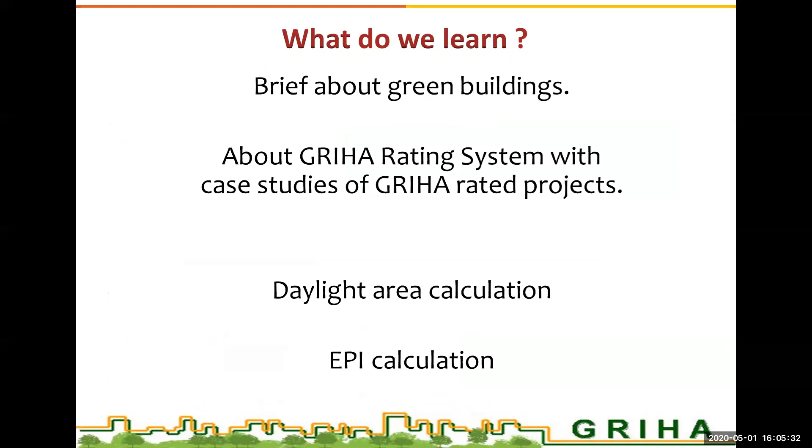So let's understand what is a green building. I request Mr. Veer to roll out the poll, please.

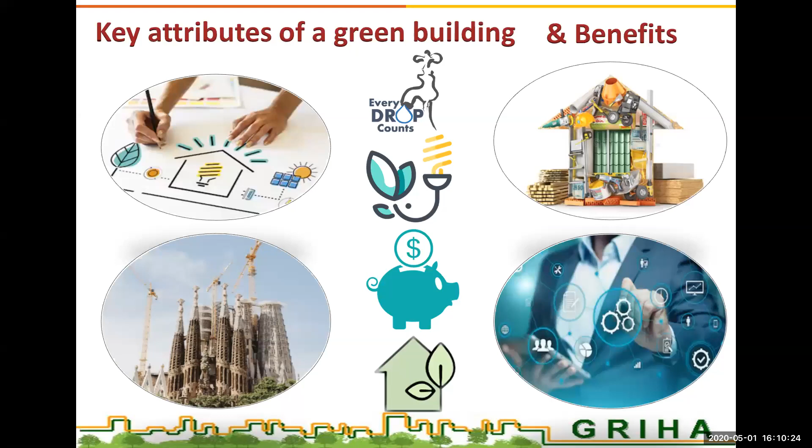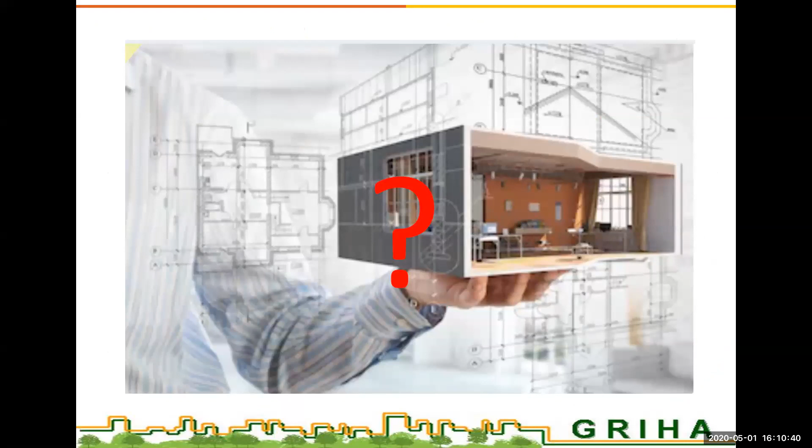But how do we design them? As we all know, for initiating the process of design, climate analysis plays a crucial role in envisioning the design of the space. Let's familiarize ourselves with the types of climate zones.

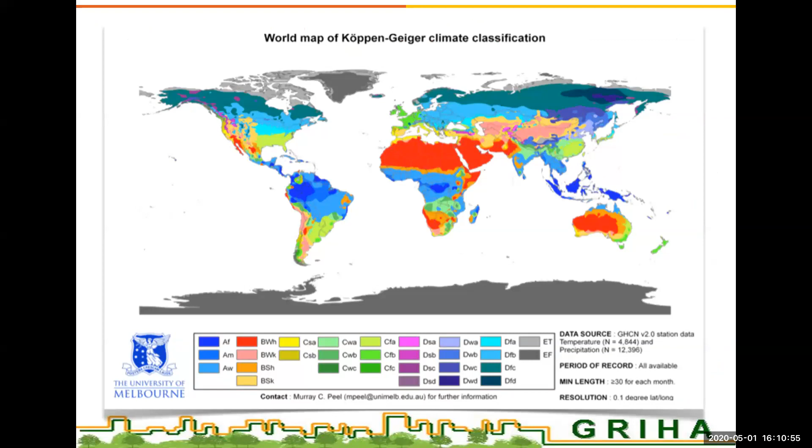Let's check how many India has as per Köppen classification. Yes, India is composed of 11 different types of climates.

But do we have any climatic classification for India of its own? Yes. NBC has classified India into 5 climatic zones, namely hot and dry, warm and humid, composite, temperate, and cold.

The building industry develops depending on 3 major factors: climate, land availability, and population for whom the structure is being built. For standards and codes, the whole world will always look towards the West, especially USA, because it has got the best standards in terms of being a developed country.

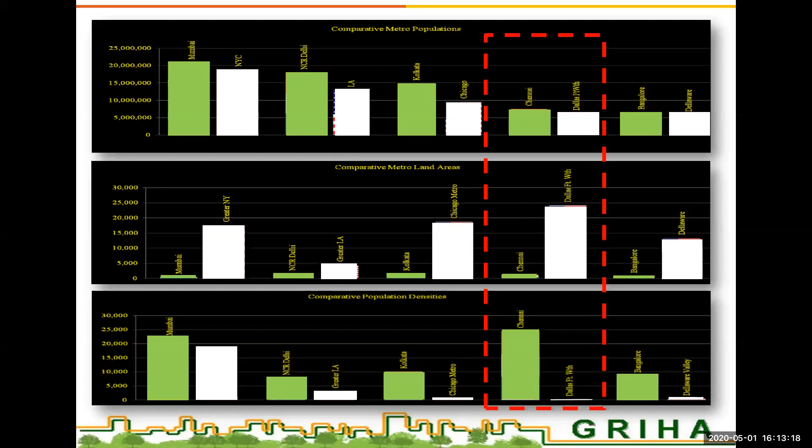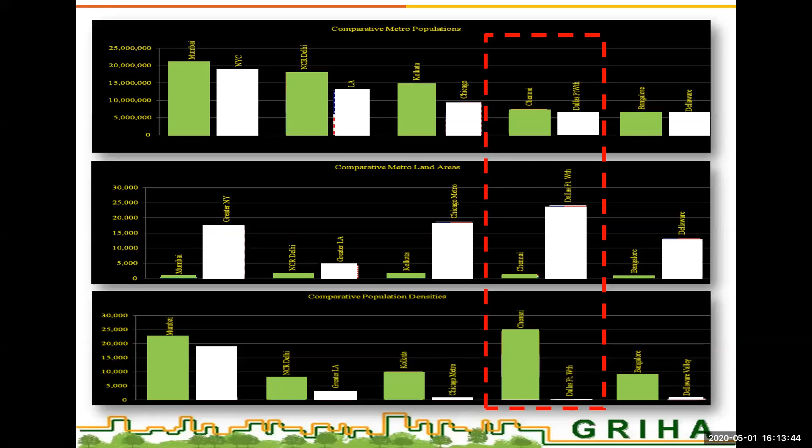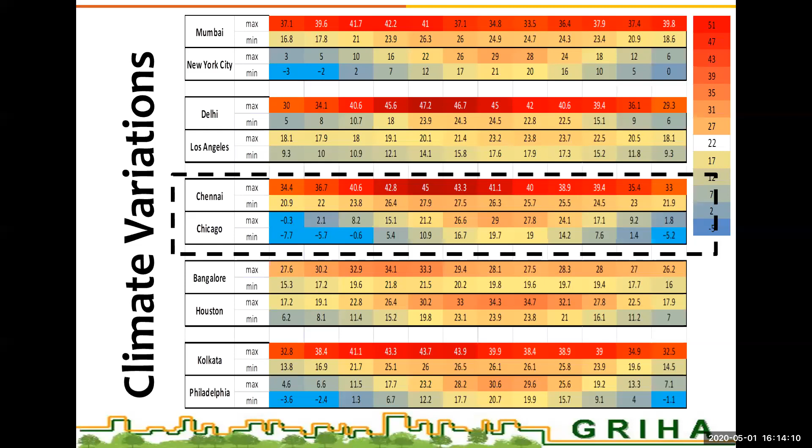We have to understand that informed decisions play a major role, rather driving the design of that space.

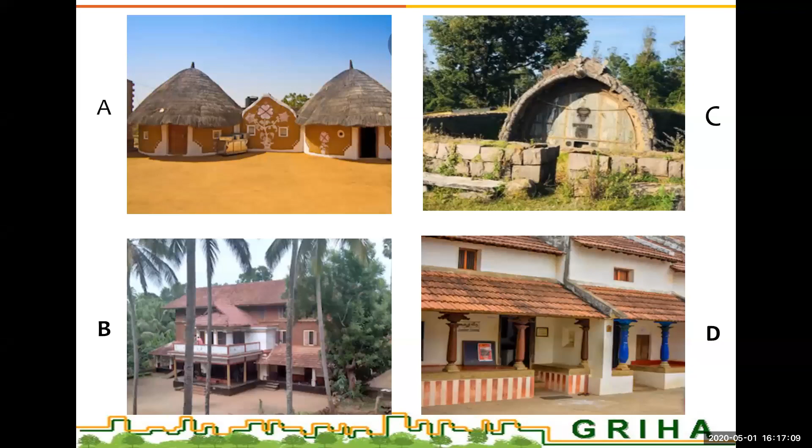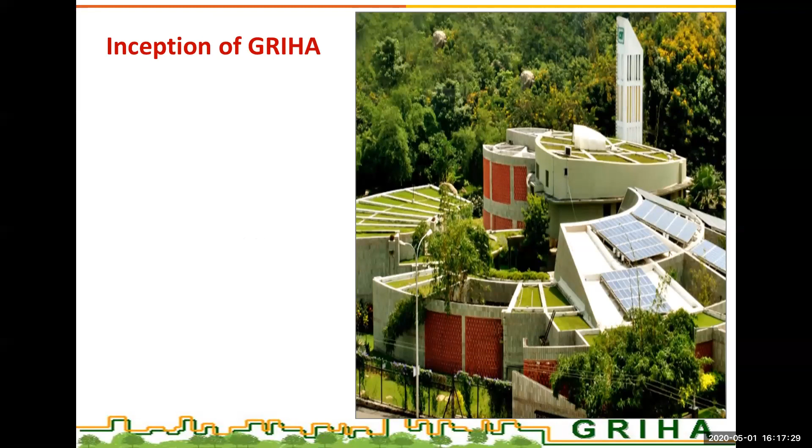Inception of GRIHA. I'm sure everybody knows which building this is. Yes, this is the office of CII, Confederation of Indian Industry, located in Hyderabad, Telangana. This is India's first green rated building. Most people are not aware that TERI, The Energy and Resources Institute, was the consultant for this project. Later, in the year 2001, this project was awarded LEED Platinum rating. During the course of work on the project, TERI realized that the Indian construction industry needs a rating system tailored for Indian climate. From then, TERI started working on green rating and released TERI GRIHA in the year 2005.

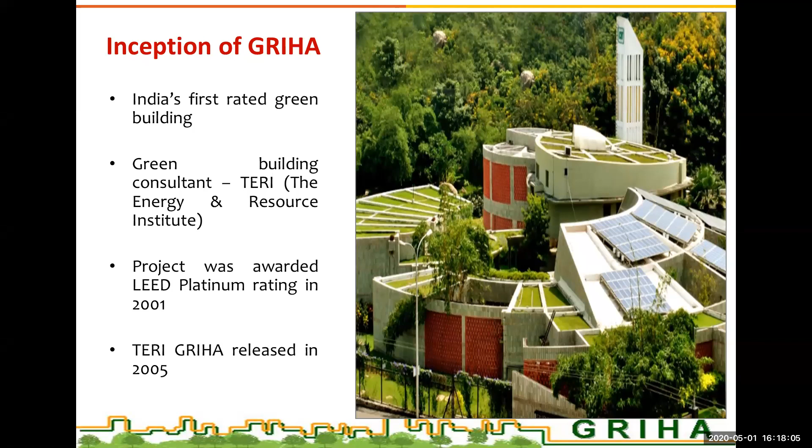GRIHA stands for Green Rating for Integrated Habitat Assessment. GRIHA is a tool developed to measure the greenness of a building throughout its life cycle. And when we talk about life cycle, this tool helps in the designing, construction, and operation of a green building. As a matter of fact, we'll be able to manage or control anything, may it be human resources, may it be food we eat, or time. It can be managed only if we keep track of it, count it, or measure it. Yes or no? Yes, only if we keep a track of it.

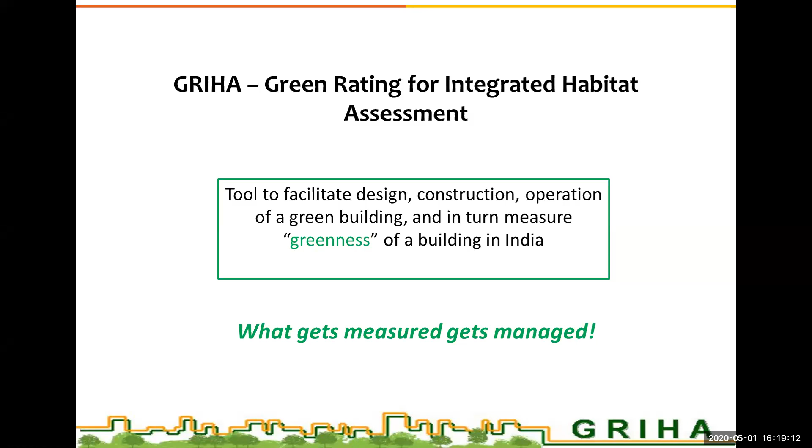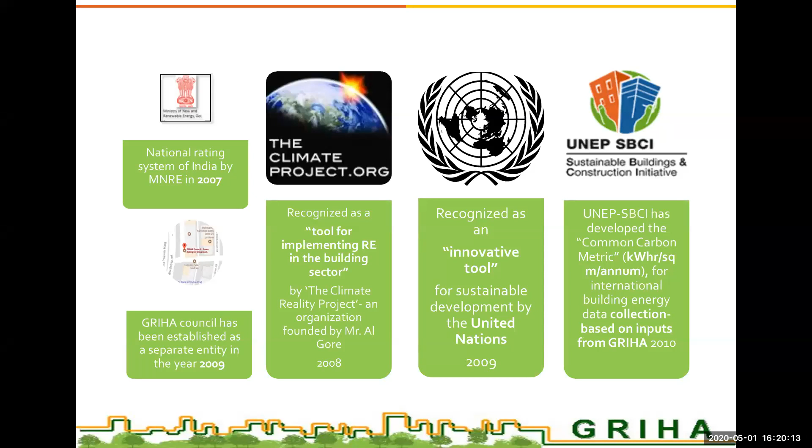Adapting the same principle, if you look at the GRIHA criteria, benchmarks are provided to measure the performance of the building. That's the principle behind GRIHA rating: what gets measured, gets managed. Later, in 2007, GRIHA was recognized as the National Rating System of India by MNRE, the Ministry of New and Renewable Energy. In 2009, GRIHA Council was established as a separate entity. GRIHA has been recognized as a tool for implementing renewable energy in the building sector by the Climate Reality Project, an international organization founded by Mr. Al Gore, in 2008. It has been recognized as an innovative tool for sustainable development by the United Nations in 2009. And in 2010, UNEP, the United Nations Environment Program, SBCI, Sustainable Buildings and Construction Initiative, developed the carbon metric for international building energy data collection based on GRIHA inputs. GRIHA rating has been recognized as India's own green building rating system and part of the mitigation strategy for combating climate change in India's INDC submitted to UNFCCC.

I'll give you a quick peek of the benefits of GRIHA rating. What are the benefits that a project gets going for a GRIHA rating? A reduction in energy consumption by 30 to 50%, integration of renewable energy to offset grid demand, reducing building water consumption by 40 to 65%. It ensures health and safety of construction workers on site, ensures compliance during operation with the help of post-occupancy performance audits, ensures waste management during construction and operation, helps in reducing lighting energy by 5 to 30% or its equivalent met through renewable energy production, and reduction in operational cost by 30 to 40% with negligible impact on the project cost.

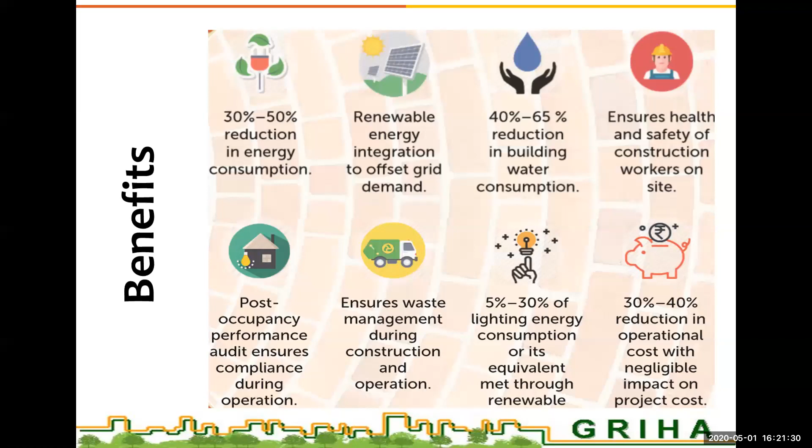GRIHA has more than 2,000 projects registered right now, with almost 850 million square feet of built up area registered under GRIHA rating. Municipalities like Pune, Pimpri Chinchwad, Noida, Greater Noida, states such as Delhi, Punjab, Goa, Sikkim, and organizations like CPWD and NBCC have adopted GRIHA rating for their infrastructure.

GRIHA has a vast catalog of variants, and buildings like homes, offices, schools, hospitals, apartments, larger campuses, restaurants, museums, and infrastructural facilities like airports can be rated under GRIHA rating.

With a vast catalog of variants, GRIHA looks at the building from two standpoints: new buildings and existing buildings. Under the new category, GRIHA offers 4 different ratings, and under the existing building category, GRIHA offers 2 different ratings.

The first category under new buildings is SVA-GRIHA, which is Simple, Versatile, Affordable GRIHA, applicable to a project with built up area less than 2,500 square meters. The next rating is GRIHA, applicable to projects with built up area of more than 2,500 square meters.

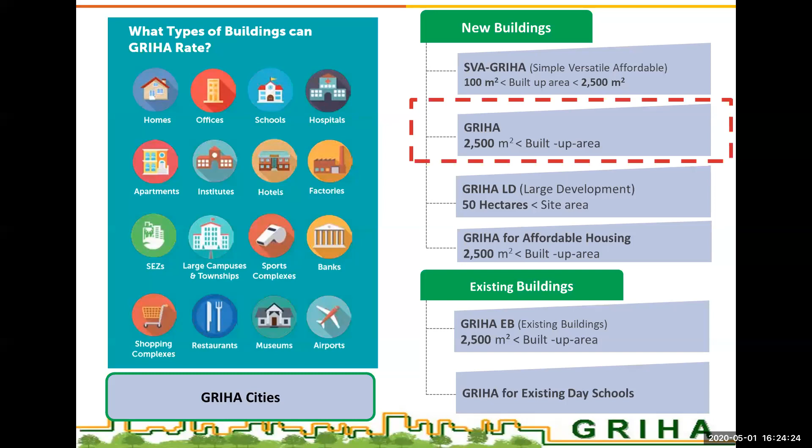What are the key features of GRIHA rating? It's a performance-based rating, wherein if the performance of the project is better—for example, higher savings in energy from the GRIHA benchmark, lesser generation, reuse, recycle or disposal of waste, etc.—it attracts a higher rating for the project. It's a common sense oriented rating system with a non-applicability clause, based on the individual project, its scale and its requirement. Every project is unique and may not necessarily meet certain facilities or provisions; in that case, the project can opt for non-applicability.

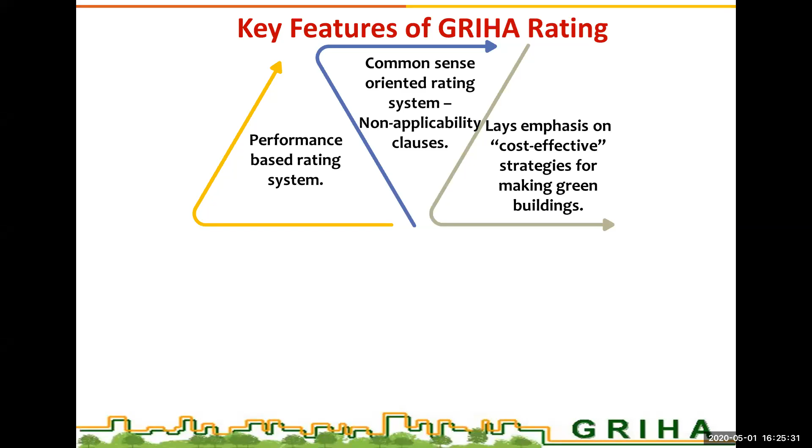GRIHA lays emphasis on cost-effective strategies for making green buildings, believing that installation of high-end technologies doesn't necessarily guarantee the building to be green. It also emphasizes an integrated design approach towards envisioning green buildings.

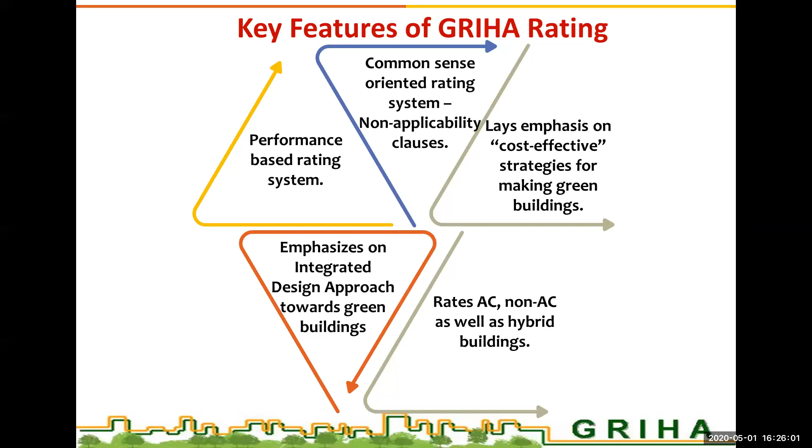GRIHA rating is meant not only for AC buildings, but also non-AC as well as hybrid buildings, which can be rated under GRIHA. When should a project team, or at what stage of the project, should the team approach GRIHA for the building to be rated?

For most construction projects, which may vary based on their size, the number of stakeholders involved, the budget, delivery date, etc., the project's life cycle, from the simplest to the most complex, is categorized into 4 different stages.

The preliminary stage of the project is design. That includes programming and feasibility, schematic drawings, design developments, and contract documents—this is what is called the design stage.

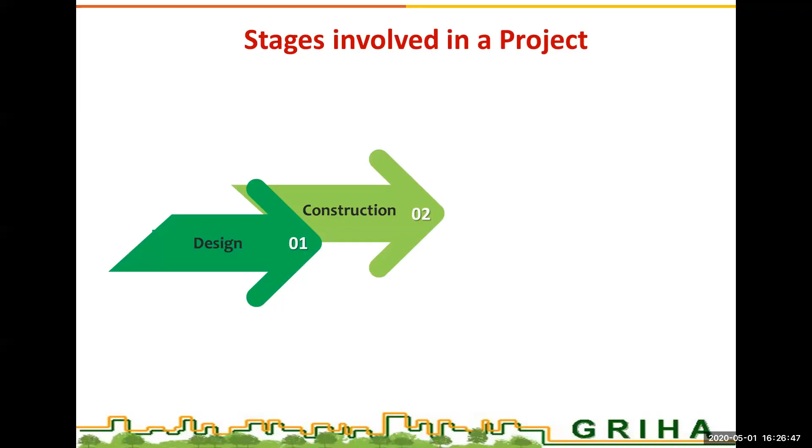In the later stage, construction of the design takes place. Various aspects like quality control of the project, how and where to store all the materials, the working hours, the project schedule, and when the project is completed all come under construction.

Then comes operation. The owner or tenant occupies the building and starts using all the different systems, equipments, and materials that have been installed or used in the project—this is operation.

Any system without proper care will not work to its full efficiency, so maintenance also plays an important role, not just building. The maintenance stage encompasses issues like the equipment used, the systems installed, their control procedures, regular maintenance schedules, and whether any specific team is required to carry this out—all these aspects come under the maintenance stage of the project, which plays a major role in maintaining the building and its systems.

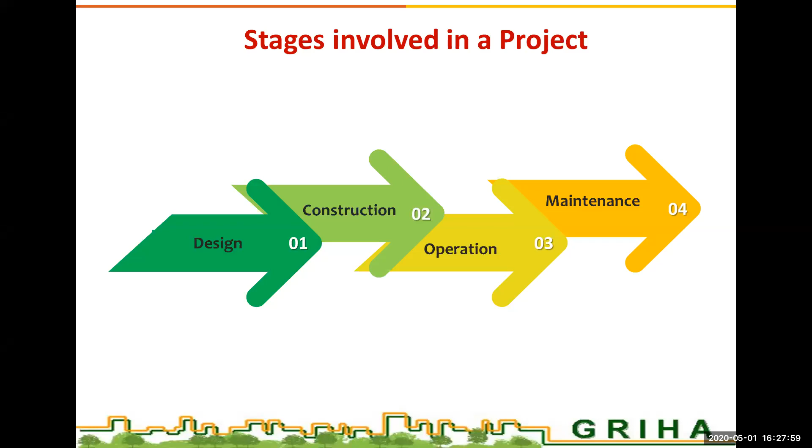But where does GRIHA come into the picture, or at what stage? GRIHA encompasses all the stages of the project, right from the beginning, the design stage, till the maintenance stage. The project should approach GRIHA during the design stage itself.

So let's look at GRIHA ratings. GRIHA rating has been classified into 9 sections, such that all the stages and processes of the project which were discussed earlier has been categorized and encompassed into these 9 sections.

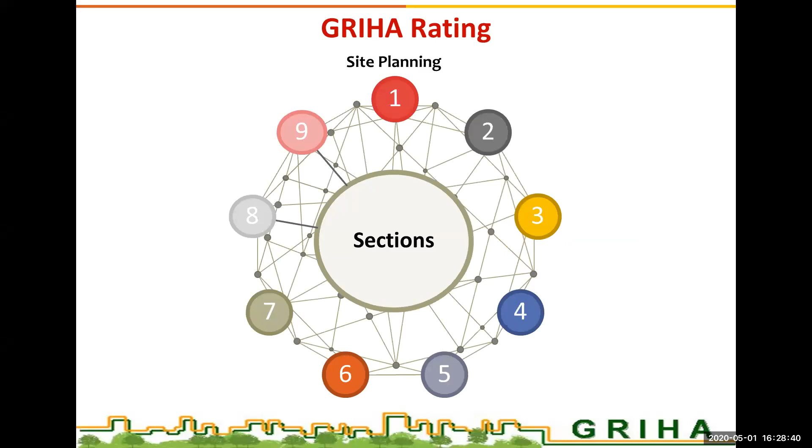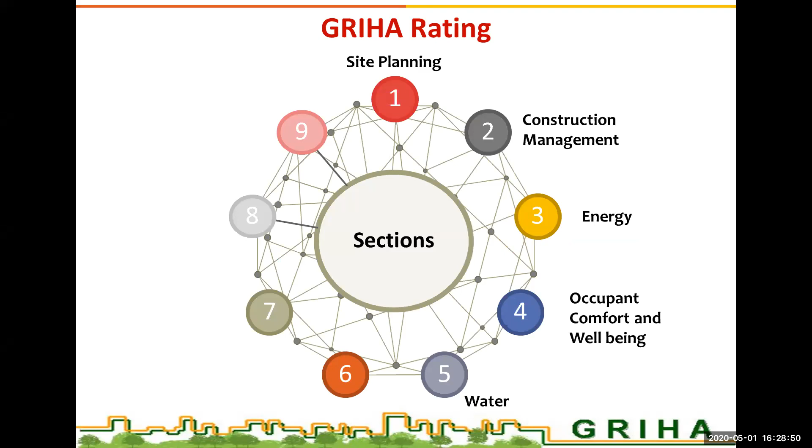It has been further divided into criteria. The 9 sections, 31 criteria. The 9 sections are site planning, construction management, energy, occupant comfort and well-being, water, sustainable building materials, solid waste management, socio-economic strategies, performance monitoring, and validation. These 9 sections are further divided into 31 criteria.

The sections and the overview of all these sections will be covered in this webinar. These sections are weighed at various weightages.

If we look at site planning, it accounts for about 8%, energy 20%, occupant comfort and well-being 12%, water 17%, sustainable materials 14%, construction management 9%, solid waste management 6%, socio-economic strategies 6%, and performance monitoring and validation 8%. If we look at it, energy constitutes a higher percentage of 20%.

Next comes water, which is 17%, and then sustainable building materials, which encompasses 14% of the total rating.

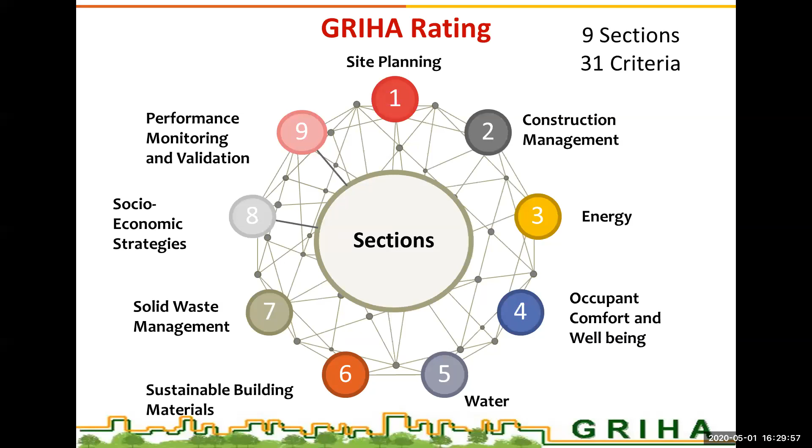How does this rating system work? It's a percentile-based rating system. The proposed rating scale for the project is: if the project acquires a percentile of 25 to 40, it acquires 1 star. A further spike of 15 points will make the project eligible for an upgrade in the rating it receives, by 1 star. Let's go into the details of the rating process as such.

GRIHA strictly follows a paperless rating system where all the registrations and submissions of documents are done online. For any project to be rated under GRIHA, the project team has to first register with GRIHA at www.grihaindia.org. A project is considered registered only after confirmation of payment and the project being issued with login credentials for further process.

Post-registration, GRIHA Council officials will conduct an orientation workshop with the project team. This team should necessarily include the architect, owner, builder, HVAC consultant, MEP consultant, and any other consultants associated with the project. The workshop is aimed at explaining to the project team the rating process and the necessary documents to be acquired or collated for submission for compliance with GRIHA rating.

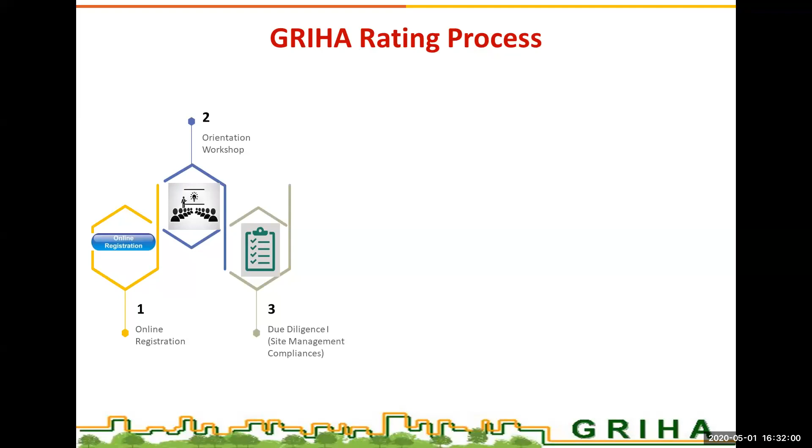Once the construction is complete or on the verge of completion, the project team is supposed to submit the entire documentation back to us online, stating that the project is ready or about to be completed, inviting us to proceed further in the process of rating.

The GRIHA Council team executes a preliminary evaluation. After the preliminary evaluation is done, simultaneously, a final site visit is scheduled and done. In this final site visit, we make sure that all that is claimed in the documentation submitted for preliminary review is in place on the site or not.

The project team is required to submit the final documentation as per the comments and feedback provided in the preliminary review and also in the final site visit report submitted by GRIHA Council officials. After this final evaluation is done, based on the documentation submitted and observations during the final site visit, GRIHA provisional rating is awarded to the project.

It is only after the submission of a post-occupancy audit report of the project with at least 75% occupancy for a year that the audit report will be reviewed and the final GRIHA rating is awarded to the project.

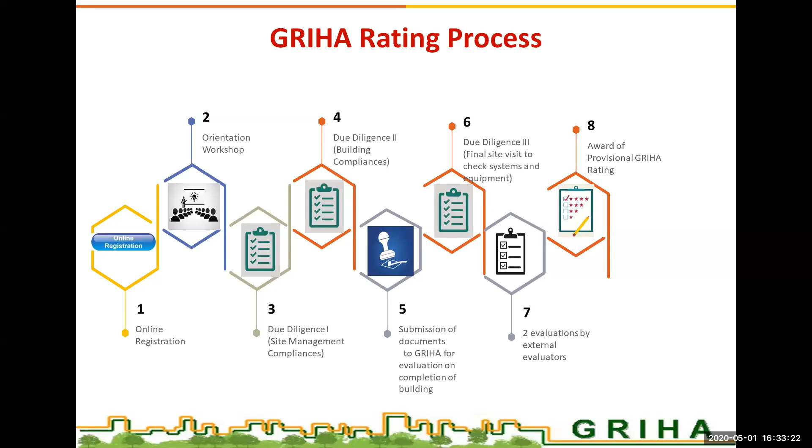Now I'll explain the GRIHA version 2015 section-wise, as explained to you earlier. As I've mentioned, GRIHA version 2015 is classified into 9 sections and further broken down into 31 criteria.

Each criteria is structured with an objective, which is what is to be achieved, that is the intent; with a requirement, as in what commitment is to be done by the project; with an implementation, what compliance should be done for that particular criteria to meet the requirements; and validation, as in how it will be checked.

In all these criteria, there are 4 different types of variations: mandatory, partly mandatory, non-applicability, and those which earn the project points. Mandatory means a project should definitely meet that criteria, otherwise GRIHA rating is denied. Partly mandatory is when a criteria has subsections in it which are mandatory, then it is considered partly mandatory.

Non-applicability clause is when a project provides sufficient documentation saying that the project doesn't need to go for a particular criteria, then that is considered as non-applicable. And more savings can earn more number of points.

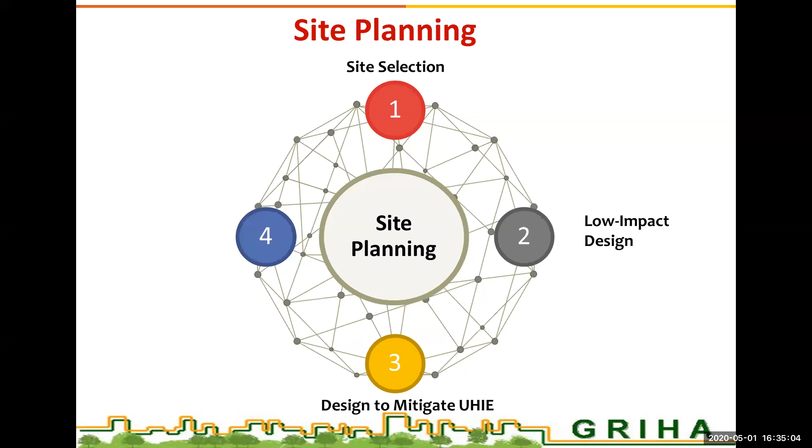The first section is site planning. This is further broken down to 4 different criteria, mainly site selection, low impact design, design to mitigate urban heat island effect, and also site imperviousness factor.

Site selection: this section makes sure that the site meets relevant master plans, local development plans, which is mandatory, to promote design strategies which enable the project to factor in ways in which the natural site features can be protected or incorporated into the project design, to ensure incorporation of site design strategies which assist in reduction of urban heat island effect, to also ensure implementation of site design measures which assist in reduction of overall site imperviousness factor, reducing urban rainwater recharge, which plays a major role for urban flooding if not addressed.

Urban heat island - what exactly is urban heat island? The phenomena of where a city center gets warmer than the surrounding areas is what is urban heat island. How can we reduce it?

We can provide soft pavings, covered with high SRI coatings, shaded by trees, shaded by vegetated pergolas, shaded by solar panels. And if the project is a brownfield or redevelopment project, or there are at least 5 basic services within walking distance of 500 meters from the entrance gate of the project, then that project will earn more points in this section.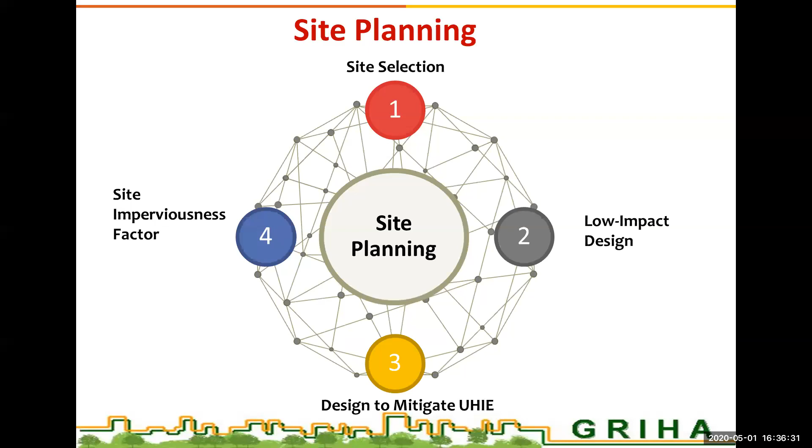Let's look at a case study. This is Akshay Urja Bhavan of Panchkula in Haryana. This building is technically oriented, placed on north and south axis in order to receive sun from the southern side.

Most windows are placed on the north facade of the building to keep the building naturally daylit. East and west windows are oriented towards south to have easier sun control through the shading devices. South has a wide spread of landscaped area.

East and west windows are oriented south. These windows help the office spaces on those faces to receive daylight. Central courtyard and single loaded corridors help provide visual comfort by natural light.

Solar chimneys to the south were built to aid ventilation through stack effect to some of the non-AC spaces in the building. Misting is also done in the courtyard to cool the ambient air, which is circulated into the building through the stack effect of solar chimneys.

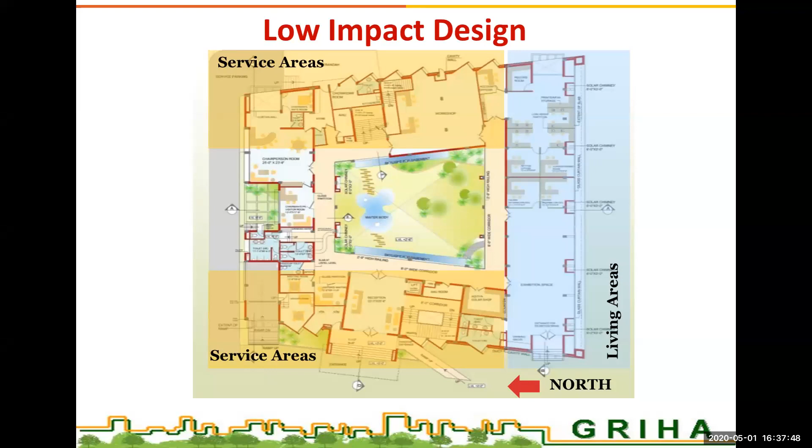AAC block masonry cavity walls along with XPS foam insulation is done in east and west facades of the building, and fly ash brick masonry done in north and south facades of the building.

Let's move on to the next section, which is construction management. This section is further broken down to 3 criteria. As the name explains, this section looks at the ways to manage or take necessary and relevant measures during construction.

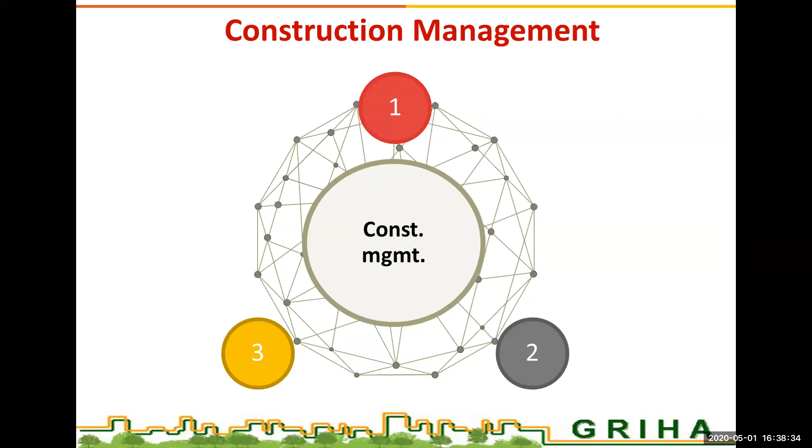So the intent of this section is to minimize air and water pollution during construction on site, adopting three strategies in which providing 3-meter high barricade through the periphery of the site is mandatory. It further ensures to preserve mature trees and fertile topsoil on site, minimizing the impact of construction activities on existing landscape.

This project can opt for non-applicability if there are no mature trees on site, if the topsoil is not fertile and cannot be made fertile through organic means. It is mandatory to ensure that no existing mature trees are cut on site, or transplant mature trees within the site and ensure that they survive, or plant 3 trees for every 1 tree cut of the same species, or a combination of all the above.

Providing wheel washing facility at the vehicular entrance of the site, covering the fine aggregate of building materials and excavated earth on site with plastic or geotextile sheets, implementing spill prevention plan, planting more native trees, preserving topsoil during construction, and ensuring adoption of good construction management practices on site can earn more points to the project.

Let's move on to the next section, which is energy, which takes up about 20% of the total rating. This section is further broken down to 3 criteria: energy efficiency, renewable energy utilization, and low ODP materials.

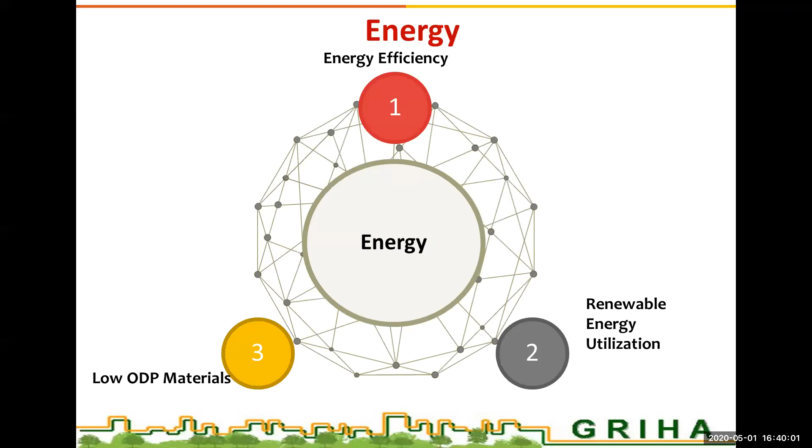We have to understand the basic concept of reduced energy is because if the occupants in the habitats are using less energy, which means they are facilitated with measures that ensure less energy consumption in the project, then also adding up to supplying the energy through renewable energy sources.

So the intent of this section is to ensure the efficiency of the project, making sure the project meets the mandatory requirement of ECBC, and all fans must meet BEE 5-star rating. This is mandatory.

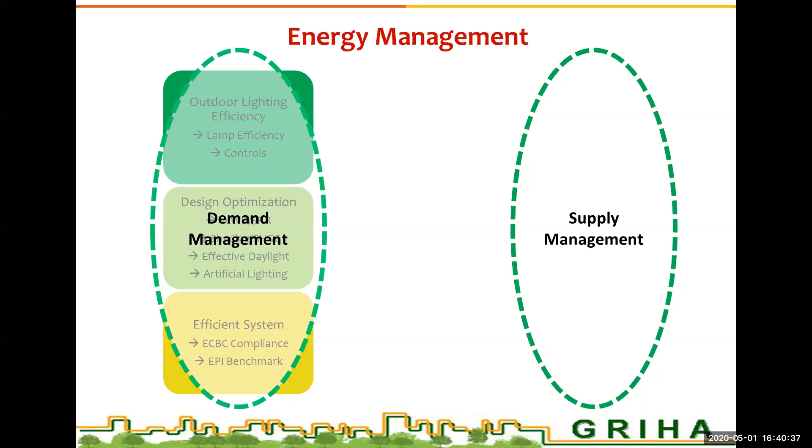The project EPI should be below GRIHA benchmark. What is this EPI? EPI is nothing but Energy Performance Index of the building, which helps in understanding the performance of the building in terms of energy. It is also to ensure incorporation of renewable energy sources in the project, which offsets a part of annual consumption of internal artificial lighting and HVAC energy demand.

Note this, we only calculate or look at internal artificial lighting and HVAC load for calculating EPI. This is mandatory. To ensure the use of materials in building insulation, such as HVAC and building insulation, and providing refrigerant in HVAC and firefighting systems which is of low ODP materials, it is also mandatory. And if the peak heat gain through the building envelope meets the GRIHA benchmark or peak heat gain factor threshold, which is only meant for AC buildings which are non-residential, then also the project is considered energy efficient.

So if 100% of outdoor lighting fixtures meet the efficacy requirements of GRIHA, or if the renewable energy systems produce more than the GRIHA benchmark, then the project can opt for additional points in this section. If a project can achieve energy demand reduction and can also produce renewable energy, this results in reduced energy consumption.

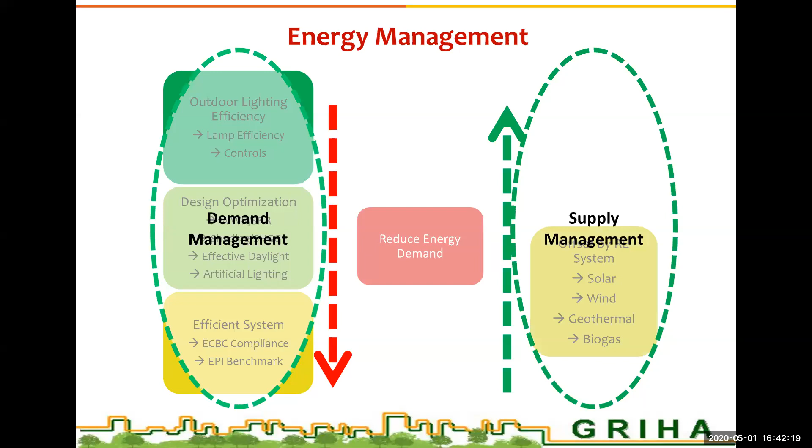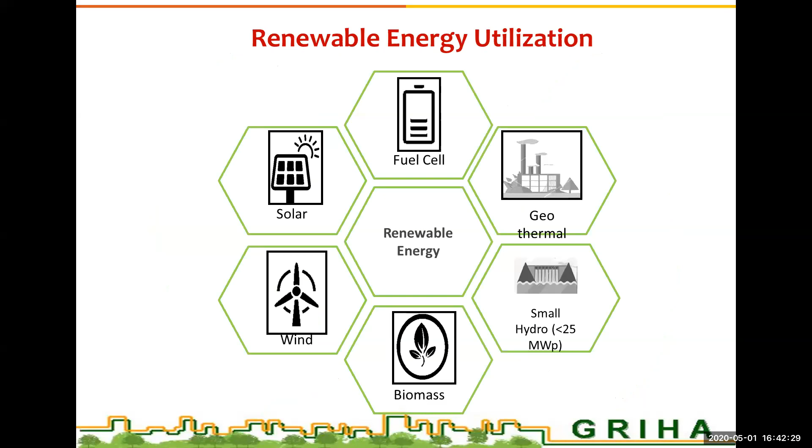So how can we produce renewable energy? There are different ways of producing renewable energy through fuel cells, geothermal, small hydro plants, through biomass, wind energy, and solar power as well. Nowadays, solar panels that can act as a roof or a facade, or building integrated photovoltaic panels, are also seen in the market for use.

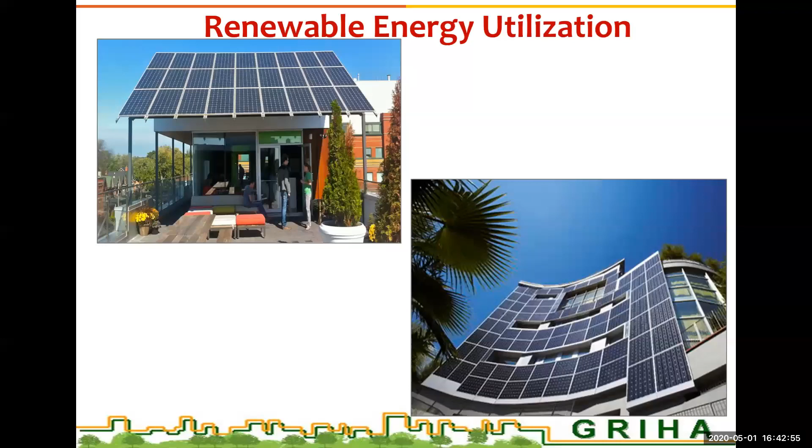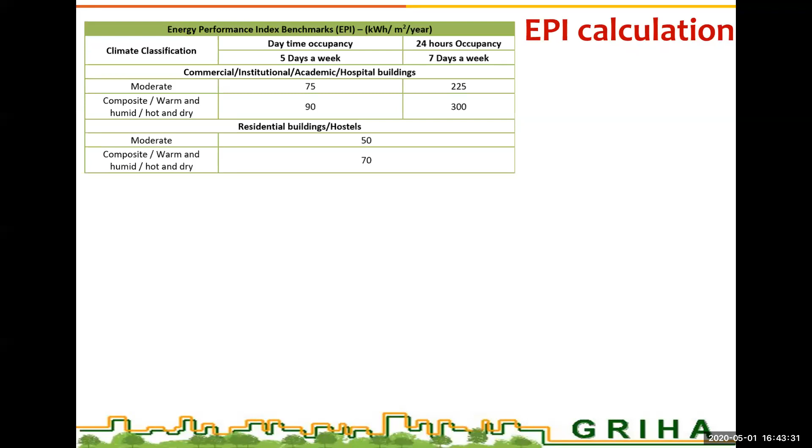I'll explain how, for example, let's say this project is an office building located in New Delhi. The minute a project is mentioned that it is an office building, it comes under the first category, which is commercial, institutional, academic, hospital buildings. And it is located in New Delhi, which comes under composite climate. So we consider the occupancy schedule, which is a daytime office building, 5 days, 8 hours per day, which means the benchmark GRIHA prescribes for this office building in New Delhi with daytime office occupancy is 90.

So if you have to calculate the EPI of a building, let's do an exercise of that. We have to calculate the EPI of the building to understand the savings in energy performance as per GRIHA version 2015. I'll explain how to calculate this.

So we have to understand what is the total load or total consumption, which is interior lighting load plus HVAC. That accounts for about 7,40,000 kilowatt hour per year. And the formula to calculate EPI is total interior lighting plus HVAC load divided by total built up area, which is 7,40,000 kilowatt hour per year by the built up area given as 11,000 square meters. So the EPI comes to 67.27 kilowatt hour per square meter per annum.

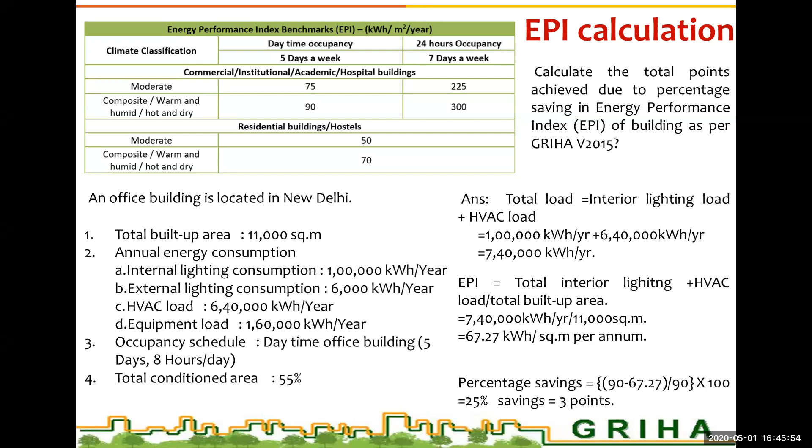So let's move on to the next section: occupant comfort and well-being. This section is further broken down into 3 different criteria, which is achieving indoor comfort requirements, maintaining good indoor air quality, and use of low VOC paints and other compounds in the building interiors. The intent of this section is to ensure that the building spaces are designed to deliver visual, thermal, and acoustical comfort to building occupants, and to design and monitor ventilation systems such that indoor air quality meets the minimum requirements as per the standards.

And the standards are National Ambient Air Quality, ASHRAE standard 62.1 section 4 to 7, and the ventilation for acceptable indoor air quality of CPCB norms, and to promote the use of low VOC and lead-free interior paints as well as low VOC adhesives and sealants in order to maintain good indoor air quality for the project occupants.

So let's look at a few examples. Is providing visual, acoustical and thermal comfort necessary? Yes, I'll show you an example.

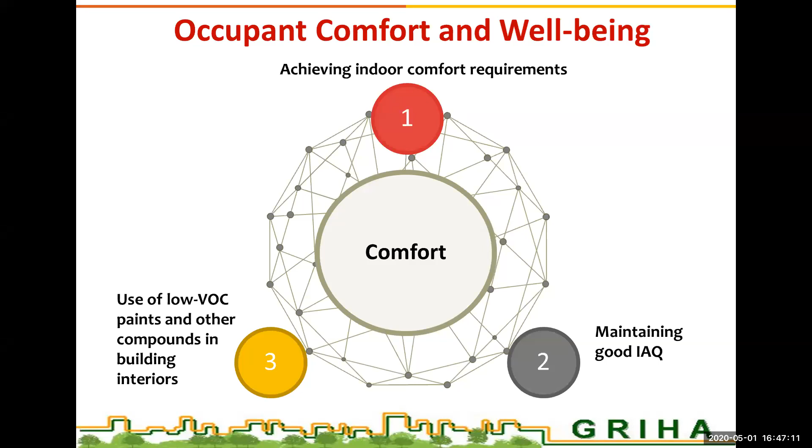It's an office space with a good stretch of windows, but what we observed was that the windows are letting in too much glare, and these people always used to put up blinds and cover it. Then what is the point in providing the windows? So we need to calculate the amount of light needed and then design the spaces accordingly.

So how do we determine how much floor area is receiving daylight? How do we calculate that? I'll give you a thumb rule, also mentioned in ECBC, to calculate the floor area receiving daylight from a particular window.

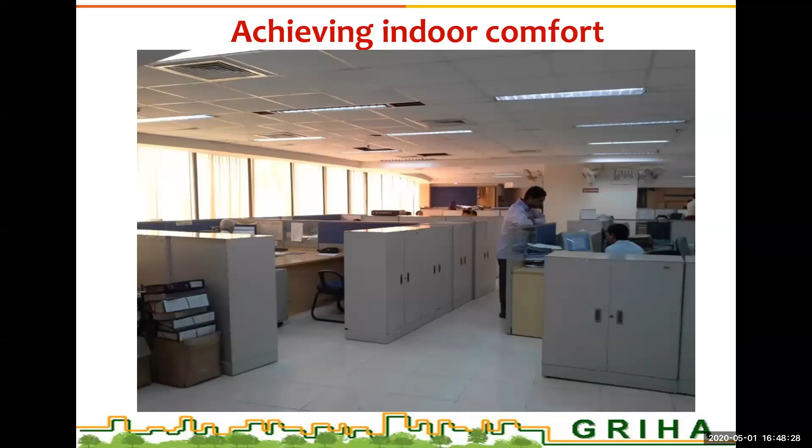I hope you understood this. This is a simpler calculation. This is how we can calculate or come up with the number or size of the window—whether we need so many windows or not, or what the size should be. This also helps in understanding what the depth of the room should be, which can be well lit through daylight.

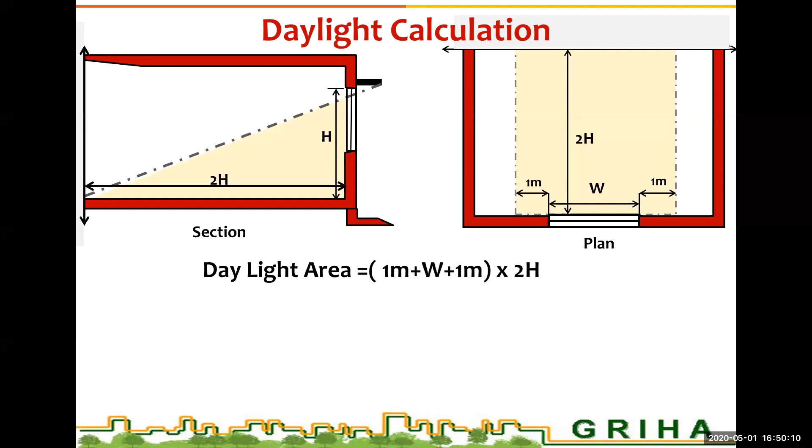So let's do a small problem here. Consider the window size is 1.2 meters by 1.5 meters and the lintel height is 2.1 meters. What is the floor area that receives daylight?

I request everybody to solve this problem. We'll wait for 2 to 3 minutes for you to calculate.

So W is given as 1.2 meters and H needs to be considered as 2.1 meters. I repeat, H shouldn't be the height of the window, but the height from the finished floor level to the lintel height, which is 2.1. I request every participant to do this small calculation.

We'll wait for 2 minutes to know your answers.

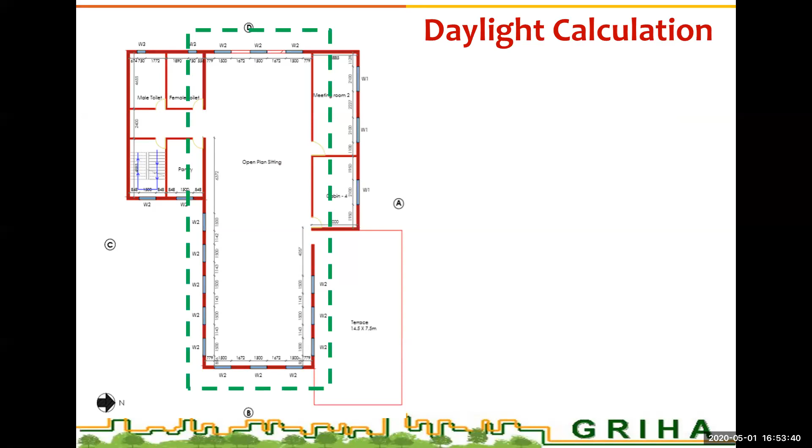Moving on to the next section, I'll give you another insight into the same daylight calculation. So let's consider this case. Try calculating the area of this open plan sitting. The general mistake everybody makes is they'll take W as 1.5 because W2 is given as 1.5, and H as 2.1.

Perfect, but daylight area is 1 meter plus W plus 1 meter into 2H. So what are the number of windows here? W2, 2 into n times of W into 2H. There are 14 W2s in this open plan sitting. So 2 plus 14 into the width of the window, and that's how people will come up with the answer. Do you think this is right?

This is where the catch is. It is an incorrect method of calculation. You have to avoid repetitions of the area, which I'll explain to you here.

Look at this. Considering the 1 meter on either side of W2 and then 2H depth, if you map it out on the floor plan, there are repetitions between each window, which means one window is catering to the same space, or 2 windows are catering to the same space twice. So if we have to calculate, why do we calculate the repetitions?

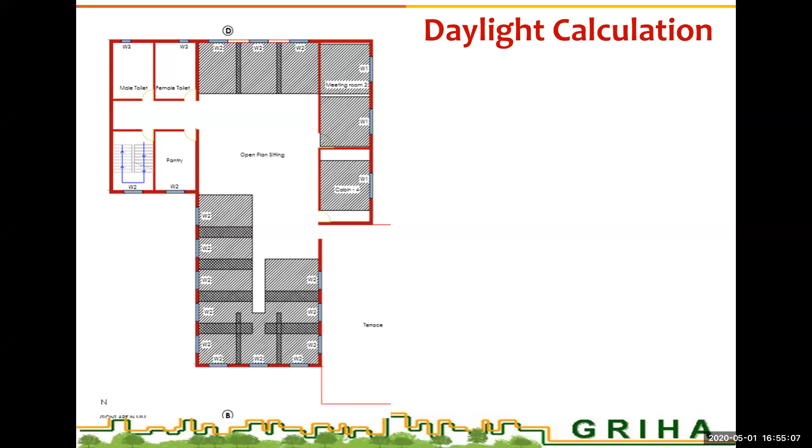We calculate the floor area, so we consider it only once. We have to avoid repetitions. So formulas in terms of W into, or Excel sheet calculations with just the window, don't work in this case. You have to map out the plan and then work it out.

Sometimes what happens is, let me take you back to this. As we're calculating the depth as 2H, for example, the height is 2.1 meters, but the room size is only 2 meters. People will automatically consider in place of H, they'll take 2.1 and then calculate the area. But consider that the room size is lesser, let's say 2 meters, and the room area will be lesser than the daylight area.

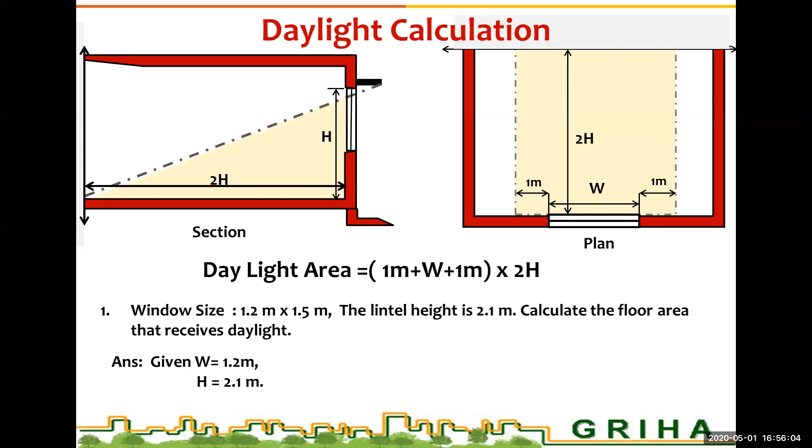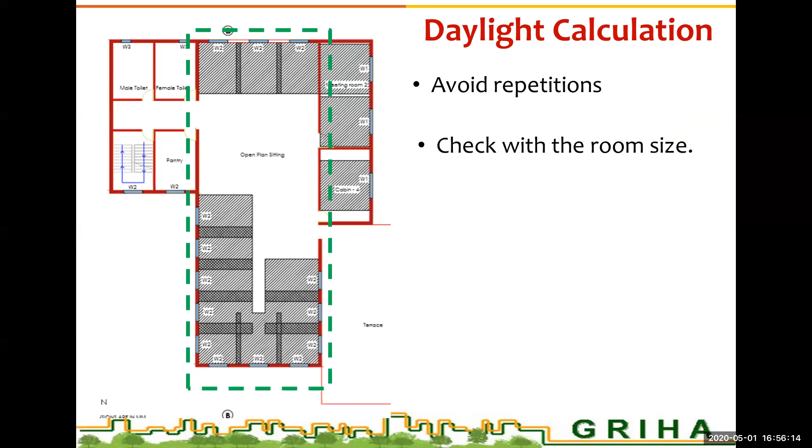So you have to make sure you plan it or map it properly on the floor plate. Only then will you understand all these intricacies. You cannot just work it out with an Excel sheet, or just use W into and do the work. And sometimes people consider the window height as H - it is not the window, it is from the finished floor level till the lintel level.

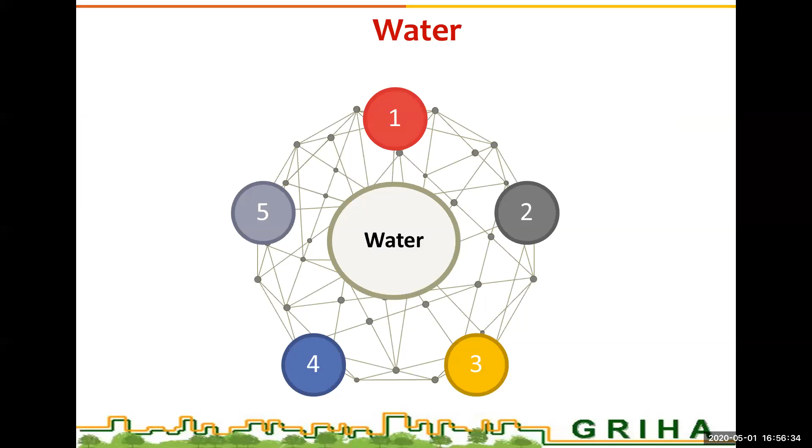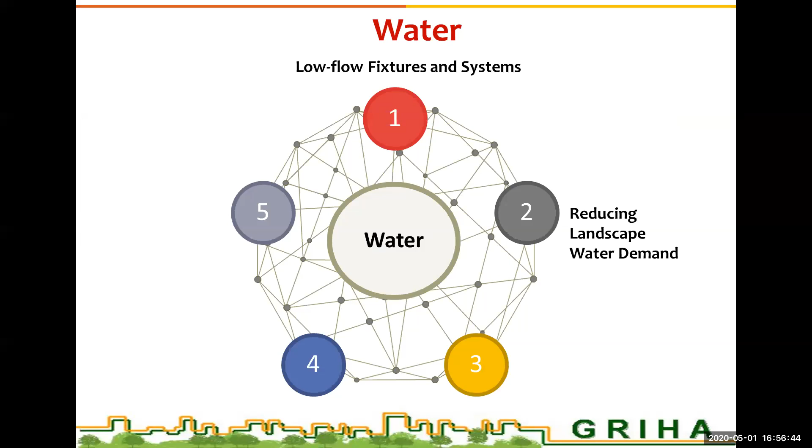Moving on to the next section, which is water. Yet again, this section is divided into 5 different criteria: low-flow fixtures and systems, reducing landscape water, water quality, on-site water reuse, and rainwater recharge.

The intent of this section is to reduce the water requirement and maintain quality through ensuring the use of low flow fixtures, and also to promote planting of native naturalized flora and use of water efficient irrigation systems for landscaping. It also helps ensure the quality of water used in the project meets the relevant national standards, promoting recycle and reuse of wastewater, as well as reuse of captured rainwater on site to meet water demand, thereby reducing the water requirement from the local municipality. It also encourages supply of water to groundwater aquifers, encouraging recharge of groundwater aquifers as well.

Reducing the water demand through selection of low-flow fixtures by 30% below the GRIHA benchmark is mandatory. And the water used for various purposes like drinking and irrigation should conform to BIS standards. If all the faucets or fixtures installed in the space have water head height less than 5 meters, then this project is exempted from this calculation.

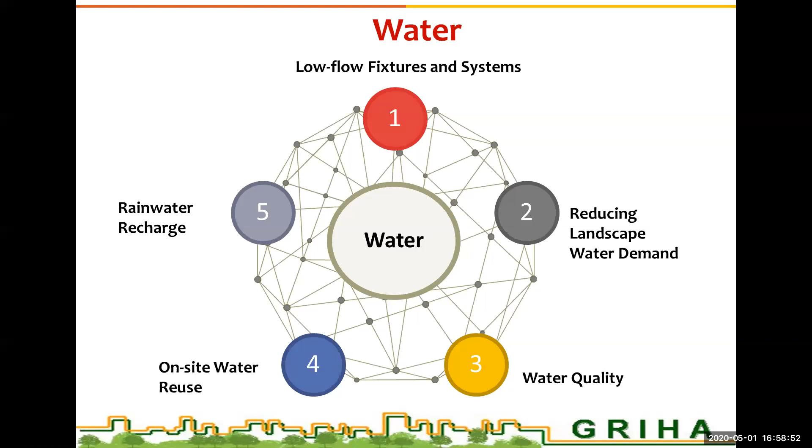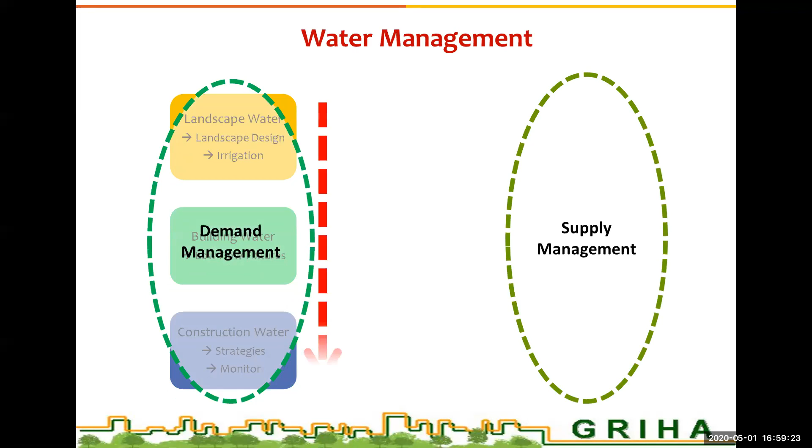So this section talks about understanding the demand, understanding the supply, and then how we can mitigate and work towards reduction of water demand, and also encourage supply of water through reuse and through recharge of rainwater. This is how it is - we have to reduce the water demand.

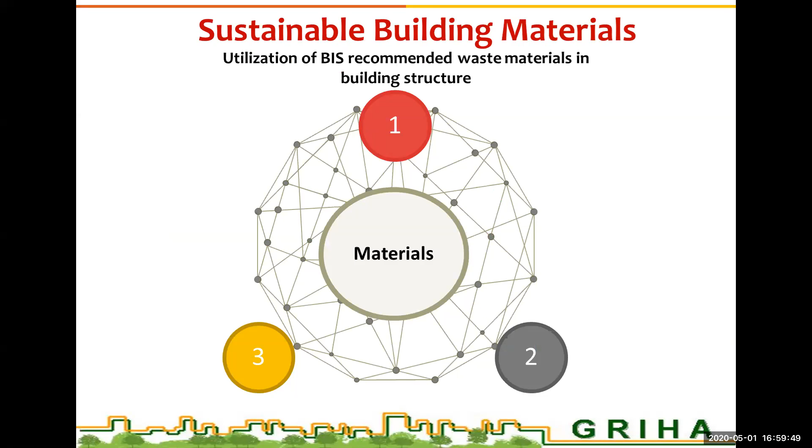So the next section is sustainable building materials. This section is further divided into 3 different criteria: utilization of BIS recommended waste materials in the building structure, reduction of embodied energy of the building structure, and use of low environmental impact materials in the building interiors.

This criteria basically helps to promote the use of BIS recommended waste such as fly ash or burnt slag, or any other BIS recommended waste having properties similar to conventional construction materials, for building construction.

This also looks at reducing the embodied energy of the building structure through the use of low embodied energy materials. If the project demonstrates a reduction of combined embodied energy of load bearing structure and masonry walls by at least 10% below the GRIHA base case, then it gets 1 point, and the project can earn more points further.

It also helps in promoting installation of low environmental impact materials in the building interiors. If the project demonstrates that 25% of all the materials used in the building interiors meet the GRIHA criterion for low impact material requirements, it will get 1 point, and can earn more points further.

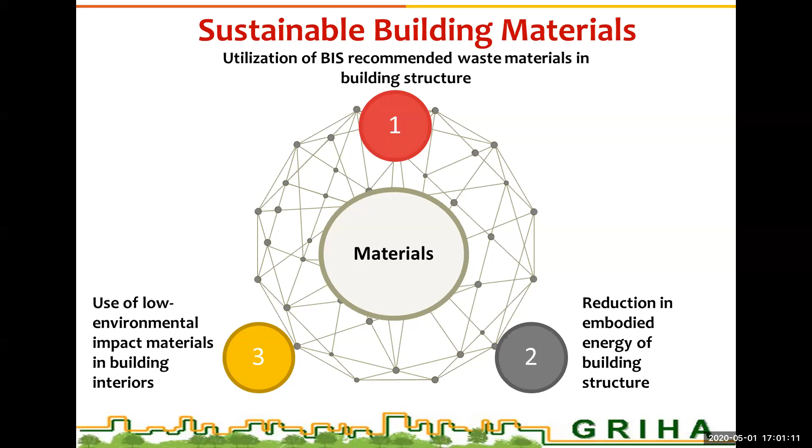Moving on, in sustainable building materials there are 2 different categories: visible building materials and invisible building materials, and structural and non-structural materials, which go into external claddings, internal finishes, structural and non-structural elements. GRIHA does not look at external cladding and finishes, so if you provide low embodied energy material in terms of external claddings and finishes, they are not accounted for.

Moving on to the next section, which is solid waste management. This section is divided into two criteria: avoid post-construction landfill, and treat organic waste on site. The intent is to provide infrastructure to future occupants so they can sustainably manage solid waste on site during the operation phase, and to promote recycling and reuse of organic waste on site. The project can claim non-applicability if the total waste generated on site is less than 100 kgs per day.

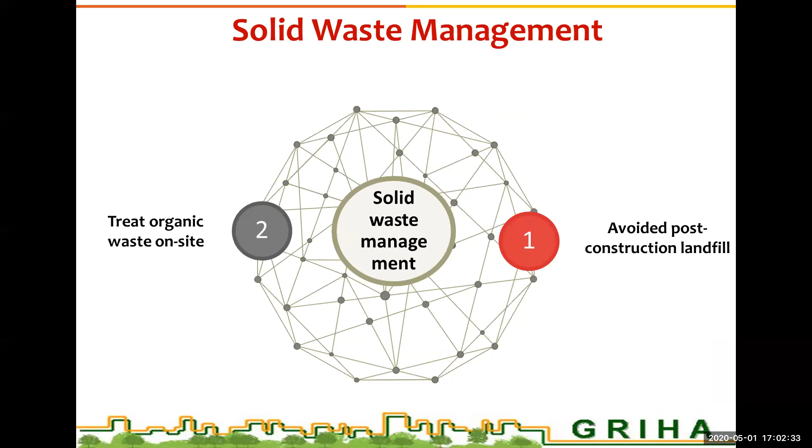So if we look at solid waste management, first, if we could segregate the waste at the generation stage itself and store it at different levels—building level, site level, or city level—and promote disposal, recovery, reuse, or composting, then the project will earn points through this section.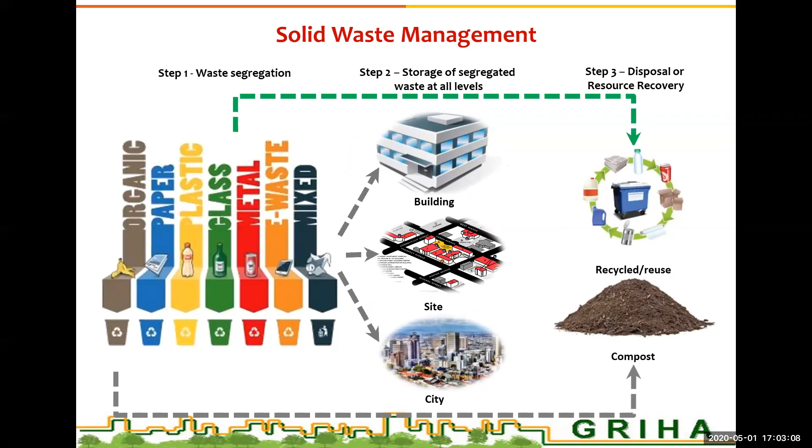Next section is socio-economic strategies. This section is further divided into 4 different criteria: labor safety and sanitation, design for universal accessibility, dedicated facilities for service staff, and increase in environmental awareness.

The intent of this section is to ensure safe, healthy and hygienic working and living conditions for the construction workers working on the project, along with promoting measures to make the project universally accessible to differently abled persons, to promote provision of resting space and toilets dedicated for project service staff, and to create awareness on sustainability amongst building users and visitors.

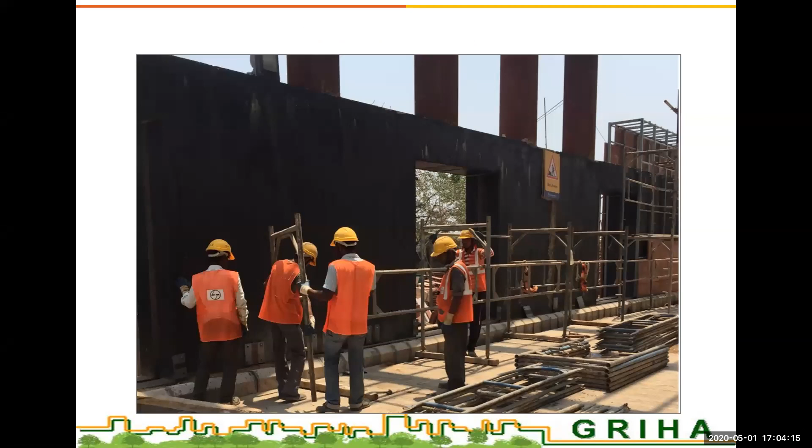Let's look at a few examples. In this slide, you can see that all the personnel are provided with hats, gloves, jackets, and shoes. This is how you have to enable laborers or construction workers with all the safety measures.

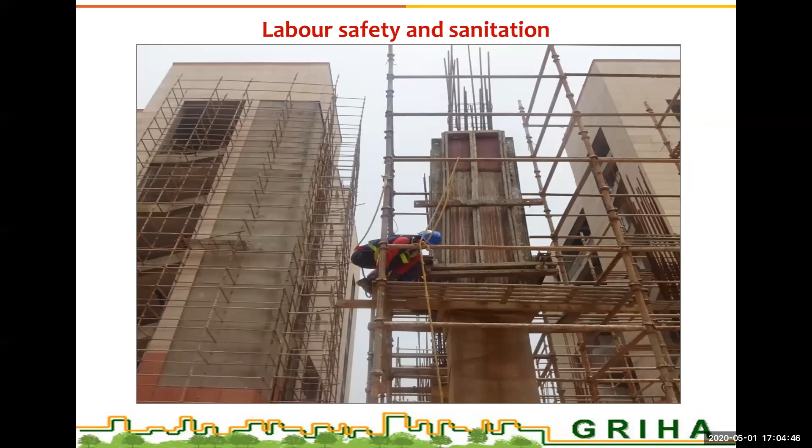Let's look at sanitation. If the project is providing accommodation facilities for laborers, these will also be checked. The accommodation provided for construction workers should be well ventilated and daylit, and they must ensure that the toilets provided are clean.

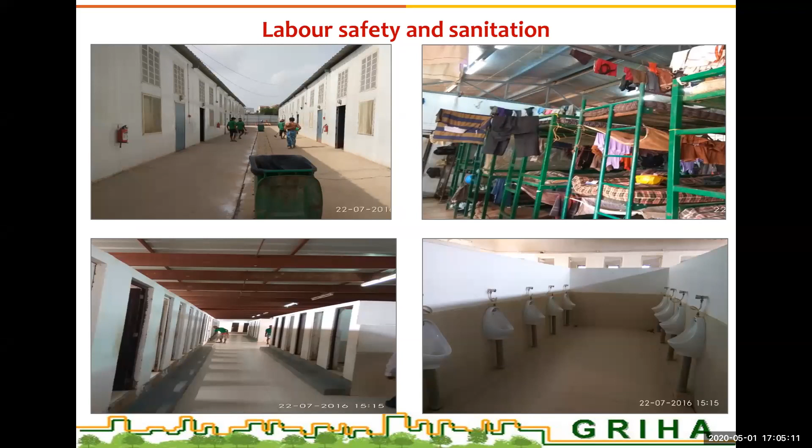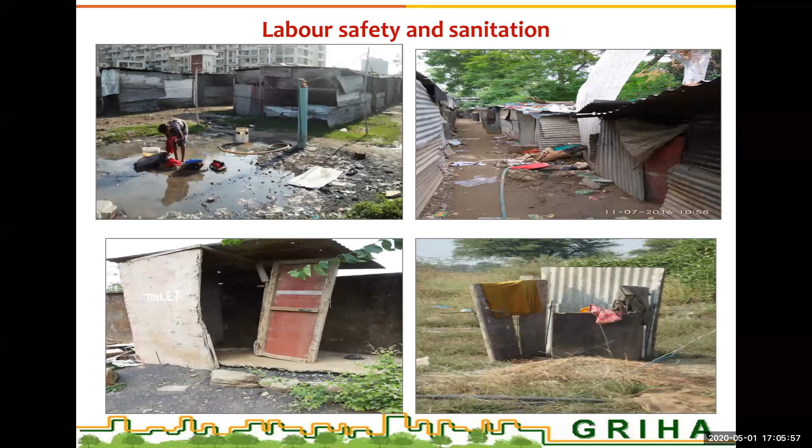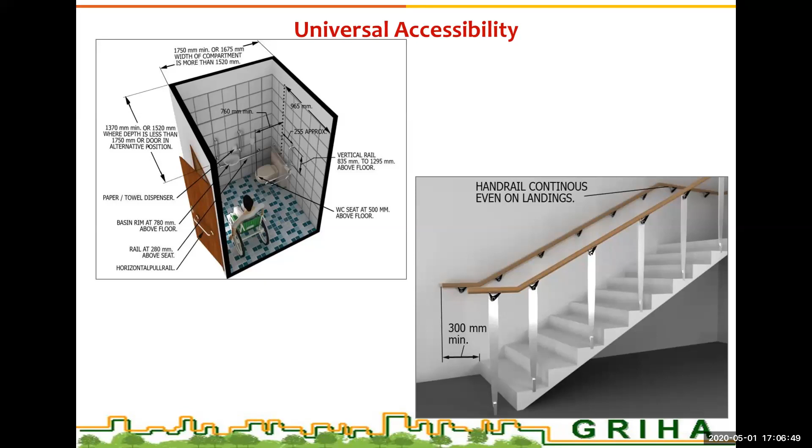In terms of universal accessibility, NBC gives a standard of how a washroom size should be and what necessities need to be provided, from providing ramps with handrails at two different levels for people who are disabled and people who regularly use them, providing sliding doors for toilets with horizontal grab bars and providing grab bars inside the toilet for differently abled persons, providing a specific facility for differently abled people to park their cars, and also lifts with braille and audio assistance for them. So all these come under promoting universal accessibility in your project, and all these need to be provided.

Coming to environmental awareness: if a project is creating awareness on sustainability amongst the building users and visitors through any means, either by rallies, putting up posters, educating visitors, or even conducting site visits for students or visitors to know about the green features in the building, all these come under increasing awareness. Then the project can earn points in this criteria as well.

Then comes the section performance monitoring and validation. Yes, we have done all these things, we have included all the measures, we have adopted various strategies, but then how do we make sure it is a green building? As I've said, GRIHA believes in what gets measured gets managed. So if we add a performance monitoring system to all the available meters or facilities we have provided, we can have control over what is the demand, what is the supply, and what measures we can take to mitigate higher usage and look for optimization.

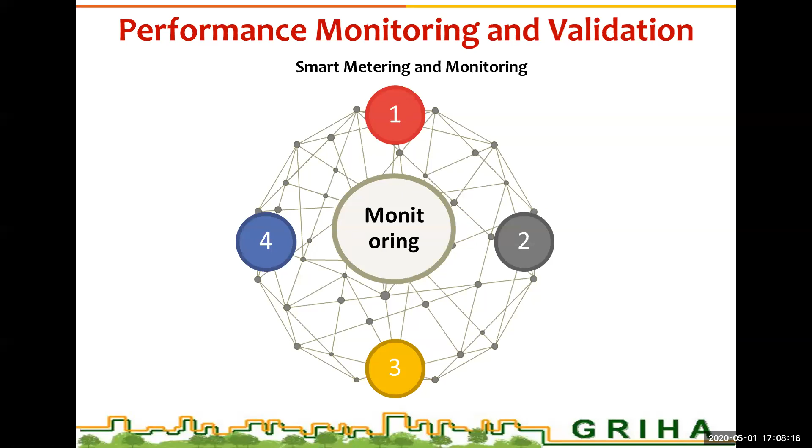So this section is furthermore divided into four different criteria: smart metering and monitoring, operation and maintenance control, performance assessment for final rating, and innovation. In this, this section promotes smart metering and monitoring of energy and water consumption.

What is smart metering and monitoring? First, the project should comply with minimum metering requirements for energy and water. The energy from the grid utility should have a meter, or if it has an on-site renewable system, that should be metered. If it takes energy from diesel gensets, or if there are multiple buildings in the project, meters should be provided at each building level.

In water, the basic metering requirement is the project has to meter the amount of water consumption, or provide a meter at the municipal supply inlet, the borewell, if the water is using STP and being reused, if it's using captured rainwater, and again if there are multiple buildings in the project. All this comes under basic metering, meaning we are understanding the inlet of all sources of energy and all sources of water.

Smart metering is if you add further meters to measure advanced energies, meaning a meter which also measures HVAC central plant energy consumption, or separately for lighting, indoor and outdoor, or separately for UPS, or a separate meter for lighting provided in basement parking. All these are a step ahead of basic metering and monitoring.

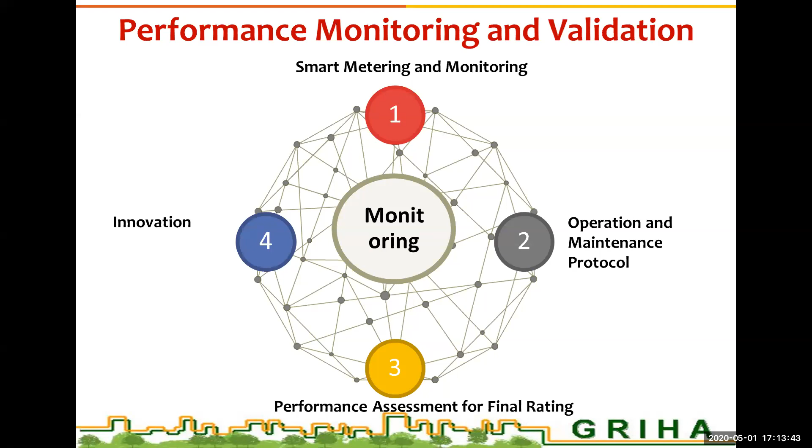That is how GRIHA rating version 2015 has been encompassed with 9 different sections and 31 different criteria. There I end the description of GRIHA version 2015. Now we'll move on to a few case studies.

As I was mentioning, Akshay Urja Bhawan - if you remember, this is the floor plan I was showing you before for urban heat island effect, and how it is reduced. Let's look at this case study. This is Akshay Urja Bhawan, which is HAREDA, Panchkula, in Haryana. The site area is 3,900 square meters, where the non-conditioned area accounts for 76% of the total built up area. This project achieves 61% reduction in energy consumption compared to the GRIHA benchmark, with an EPI of 17 kilowatt-hour per square meter per year. It was completed in 2012 and has been awarded GRIHA provisional rating of 5-star.

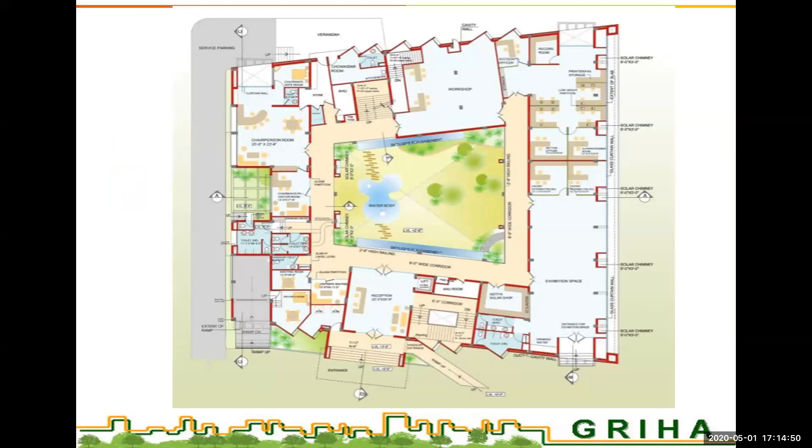The project has adopted strategies such as site planning to reduce energy and water consumption. Renewable energy technologies have also been installed on the site. As I mentioned earlier, the building is placed on a north-south axis to receive sun from the southern side. Most windows are placed on the north-south facade to keep the building naturally daylit. East and west windows are oriented towards south to allow easier sun control through shading devices. Towards the south, there is a widespread landscape area. The height of the building is considered such that the shadow on the neighboring building is minimized.

In terms of reducing water consumption, efficient fixtures were used, accounting for 70% of annual water consumption reduction with respect to the GRIHA benchmark. A 6.25 liter rainwater storage tank has been designed in the basement to collect water from the roof and courtyard. Percolation pits along the driveways collect rainwater, and overflow is directed to the municipal sewer. The collected rainwater is then treated by pressure sand filter and activated carbon filter and further used for potable use, HVAC plants, and horticulture. Solid waste is directed towards municipal sewer lines.

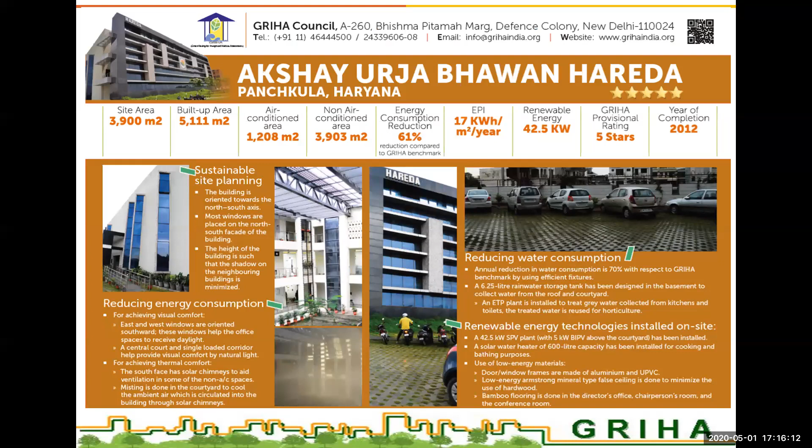The central courtyard and single loaded corridor help provide visual comfort through natural light, and solar chimneys were built towards the south facade. In the south, where the living areas are marked, solar chimneys were built towards the southern facade to aid ventilation. Roofing tiles with high albedo reflect maximum solar radiation. In terms of renewable energy, 42.5 kilowatts of solar photovoltaic panels and 5 kilowatts of building integrated photovoltaic panels above the courtyard were installed in the project.

The door and window frames and AAC blocks used in the project are low energy building materials. So if we look at all the criteria, we talk about orientation, low impact design strategies, and low impact or low embodied materials - all of these were adopted in this project.

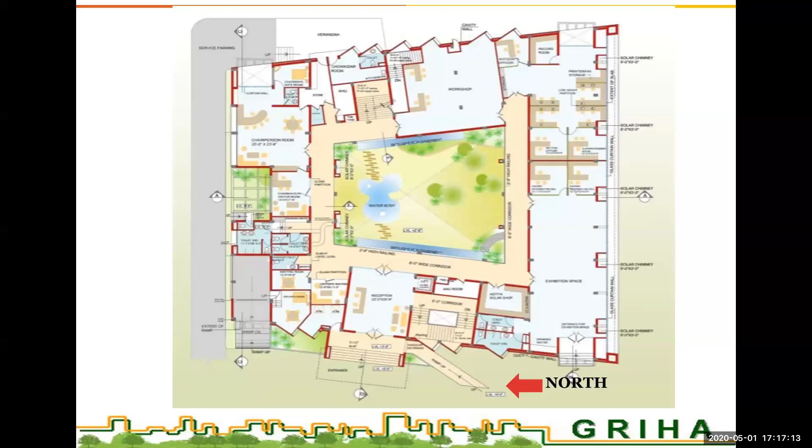Let's look at another project, which is Govardhan Eco Village. I hope most of the students have already heard of it. I suggest you go for a site visit as well - it's a pretty interesting project. It's located at Galtare, Wada, Thane, Maharashtra.

Site area of the village is 70 acres, with 57% energy consumption reduction compared to the GRIHA EPI benchmark. Throughout the site, spaces are completely non-air conditioned. It was completed in 2012 and awarded GRIHA provisional rating of 5 stars.

The layout was envisioned based on hydrogeological survey inputs so that the development does not impact the recharge and discharge zones of water. Proper care was taken during site planning to understand the positives and negatives of the site and plan accordingly, taking advantage of the positives.

The massing was done in a way that minimal trees are cut, continuing the agriculture. In the project, minimal trees were cut, and the design has been developed in such a way to reduce tree cutting.

The building was built on hard ground, saving on foundation cost, reducing both cost and material used. Stabilized solid soil cement blocks were used on walls, left unplastered, which accounts for a local material with lower embodied energy.

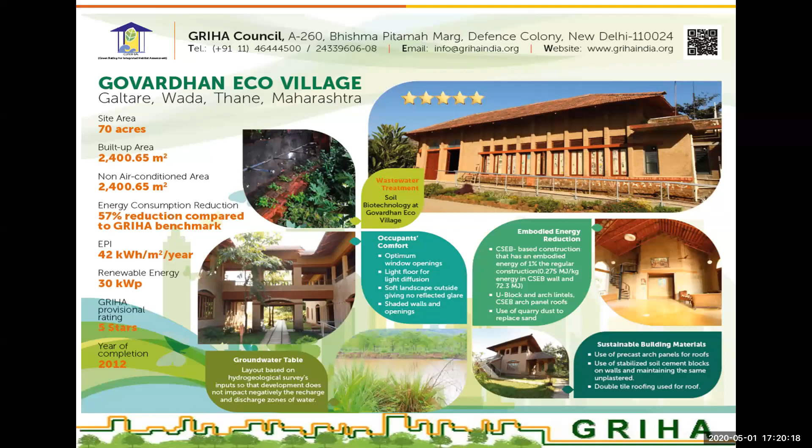I end my presentation with this case study of a GRIHA rated building. And I would like to tell you how GRIHA is helpful for professionals and students.

An individual can become a GRIHA evaluator or a GRIHA certified professional. As I mentioned, in the innovation section, if the project team has a GRIHA certified professional, they will gain 1 point. For students, there is a student membership called ACE, Agents of Change for Environment.

For organizations that are manufacturers of a product, there is something called the GRIHA product catalog, developed to help people understand what are green materials in the market, because there are many materials coming into the market claiming to be green.

There is also associate membership for organizations committed to sustainable built environment, like green consultants, who can join hands with GRIHA and become associate members.

There is a program called Catalyst, creating awareness through academics, leading to youth sustainable transformation, bringing together institutional heads towards a common goal of educating and sensitizing youths about sustainable habitats. I suggest all students or professionals look at these options for how you can get associated with GRIHA or the sustainable built environment.